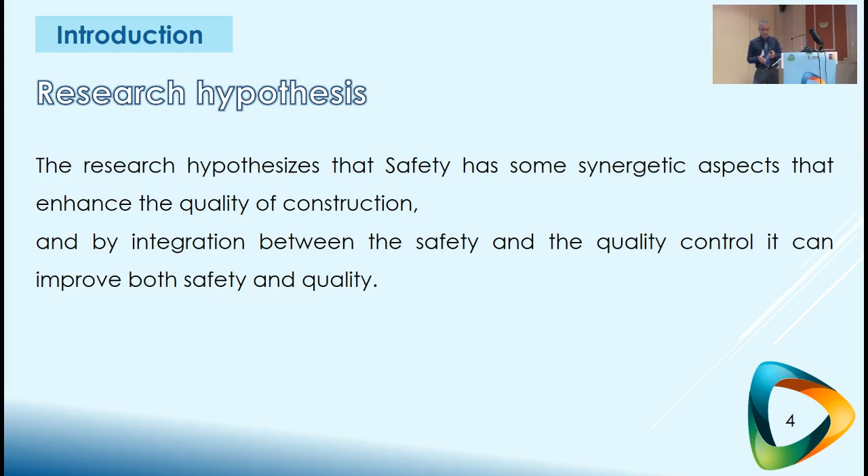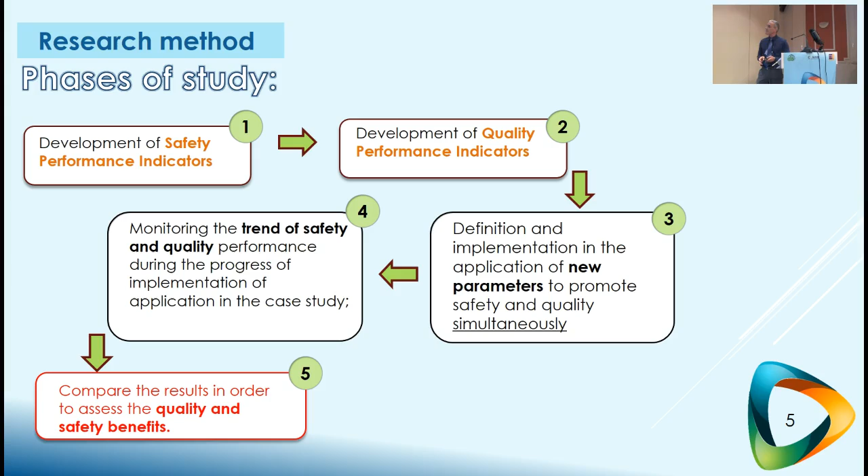This is our validation research. We developed two safety indicators and one quality indicator, then monitored these indicators following implementation of our mobile application, which I will describe. We tried to figure out if we can achieve significant improvement in both quality and safety in the case study project.

The first indicator was the safety indicator. We classified the safety behavior of construction workers into 5 categories. Remarkably safe behavior means workers fulfilled all expectations without limitation, including personal protective equipment, workstation setup, care for teammates, and surrounding environment. I cannot detail it fully here, but we'll submit a paper soon to ASCE where you can see the precise definitions: safe behavior, reasonably safe without personal risk or risk to colleagues, risk to himself, risk to others, and the worst behavior, risk to himself and others.

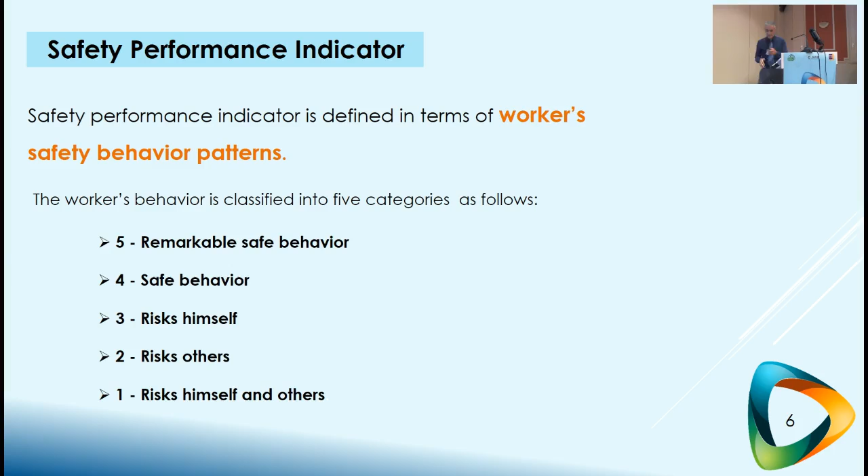We have a data collection form that we fill weekly, on the same day and hour each week, monitoring at least 10 workers over a period of 2 hours. This produces a safety sample that can represent the safety environment and safety performance of the workers.

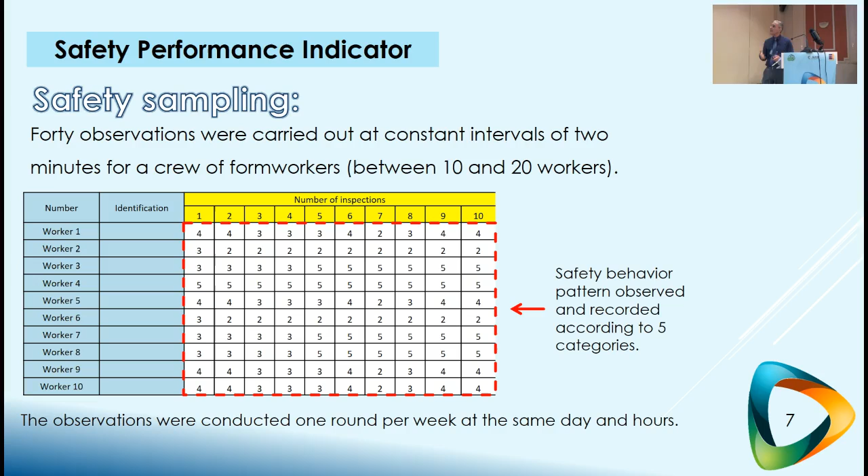It looks like this. This is an example of a not-so-good safety profile. We can see that only about 50% of the behavior falls under category 4 or 5, namely safe or remarkably safe, and 50% is under expectations: risk to himself, others, or both.

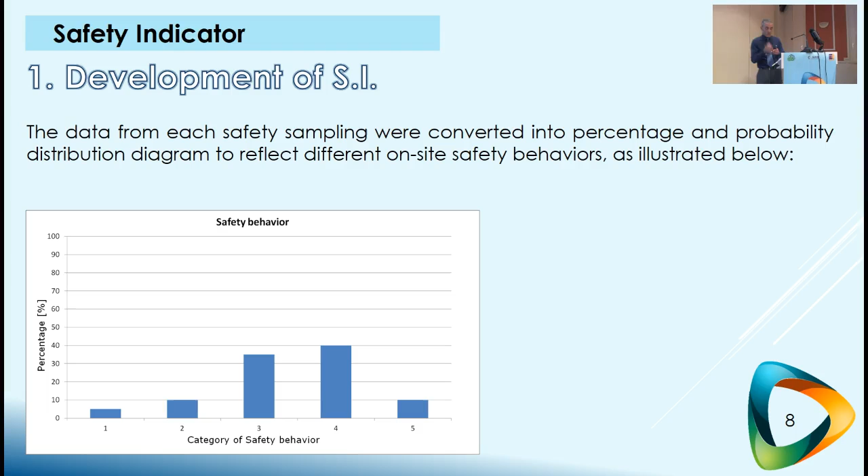Using this indicator, we give each category a weight: one for remarkably safe, 0.75 for safe, 0.5 for risk to himself, and so on. By multiplying the number of observations for each category, we get a good expression of the safety culture on site. This is a proactive indicator that can predict the culture or safety performance of the site.

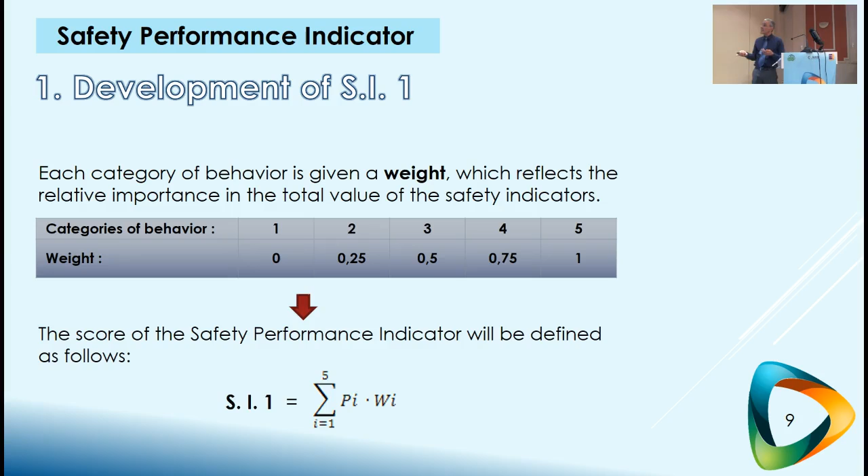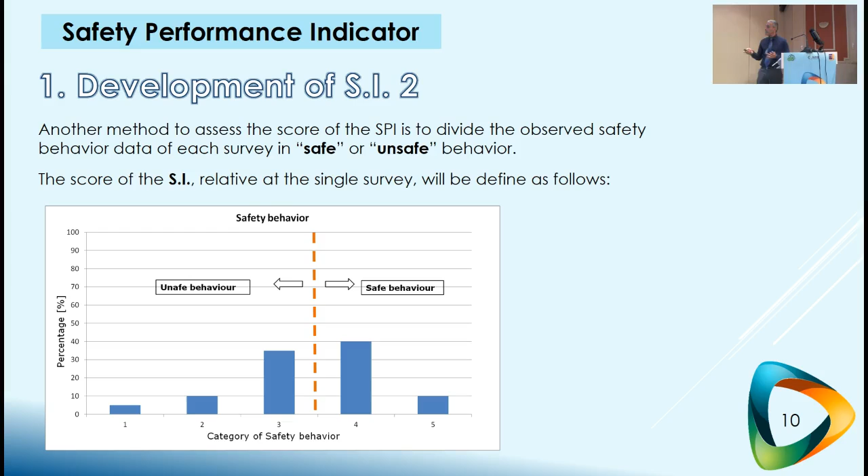At the same time, we can split observations into two categories: safe, meaning category 4 and 5, and unsafe, categories 1 to 3, to see the level of risk on site. The total of categories 1 to 3 indicates the level of risk. We can quantify easily the level of risk that workers are found in during sampling or performance.

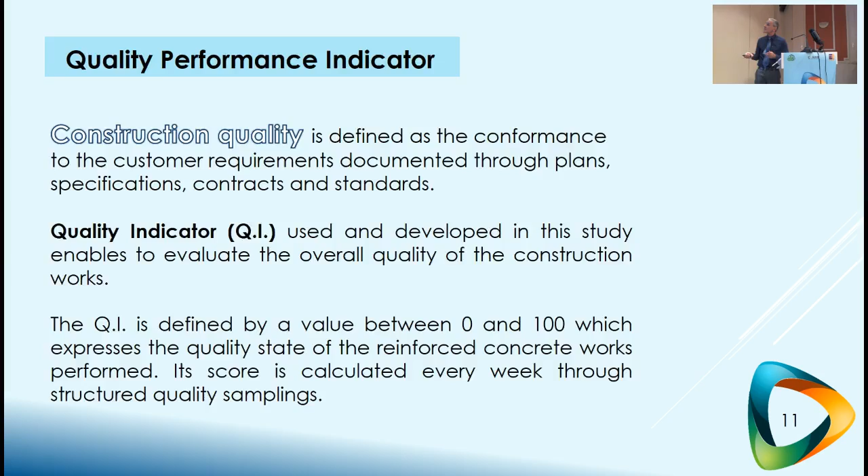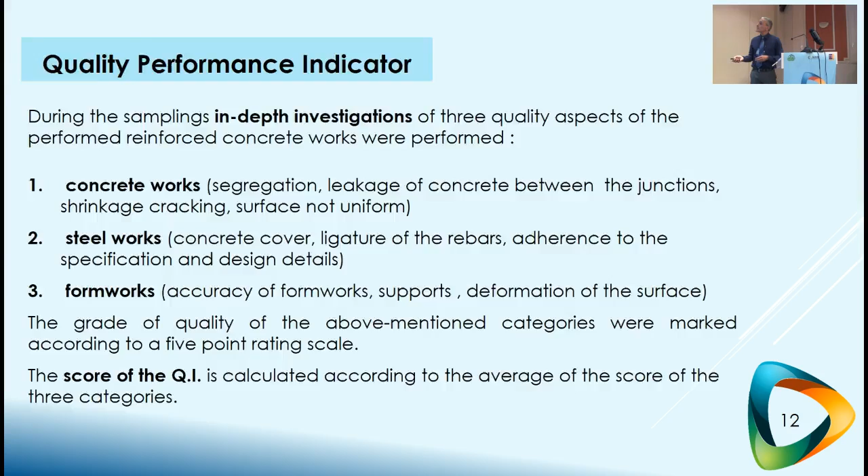In a similar way, we developed a quality indicator regarding structural or skeleton works. This indicator assessed the quality of concrete works, steel works, and formworks according to basic requirements and standards. We monitored it at the same time, on the same days, in a manner similar to the safety performance monitoring.

This is the architecture of the application and the phases of implementation. It takes about 2 weeks to establish the application on a construction site. This includes building the database for the project, including all workers, equipment, and entities, which is then automatically synchronized with the application.

The application is mounted on mobile smartphones. Phase 3 is the characterization and designation of each entity using a quick response code with the application. Phase 4 is documentation of the control using a digital checklist.

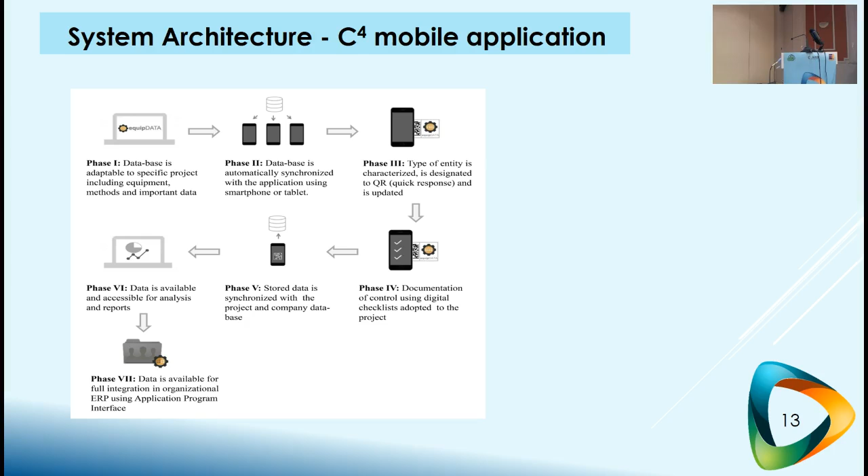In this phase, the application is on at the site, and the data is stored to a cloud computer and synchronized with the project and company database. Then the application can be used for control and communication of safety and quality. At this stage, the data is available, and senior management at all levels of the construction project and company can monitor the safety and quality, and the data is available for full integration in the ERP system of the company.

This is an outline of reports produced by this application. The activities and services carried out with the application are preparedness assessment.

Survey and tasks, safety and quality surveys, and safety and quality tasks, instructions, daily safety quality audit, normally carried out in Israel by the foreman or the superintendent on site, intervention and corrective activities made also by the first line management, pre-work risk assessment. Pre-work includes ladders, formworks, assessment of formworks, and others.

And safety investigations in case of illness or an event of safety, such as an accident or a violation of regulations. The reports include a hazard assessment report, produced daily, documentation of the survey and inspection by the foreman. If something is not carried out in the morning, it should be carried out. We have a report if it has not been completed by the crane operator or by the foreman.

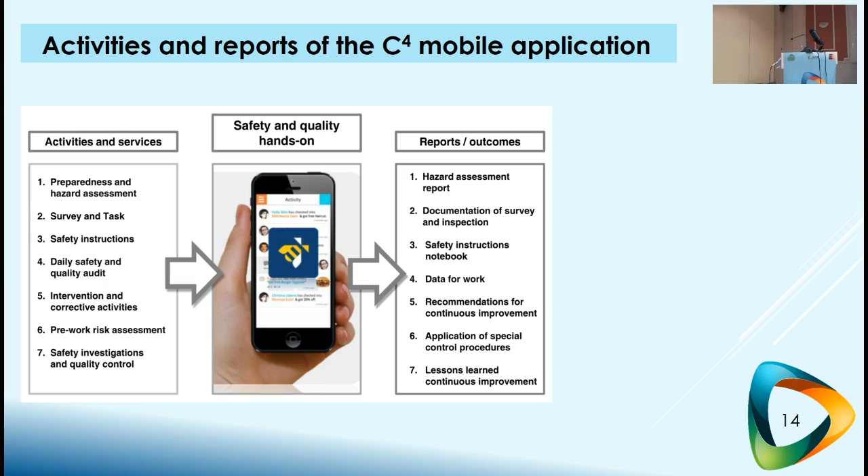And then lesson learned. So the application uses wireless medium, internet or cellular. Transmission rate is 5 seconds. Barcode is quick response. Operations run on iPhone operating system or Android, and the database is SQL, HTML, and GET and POST API protocols.

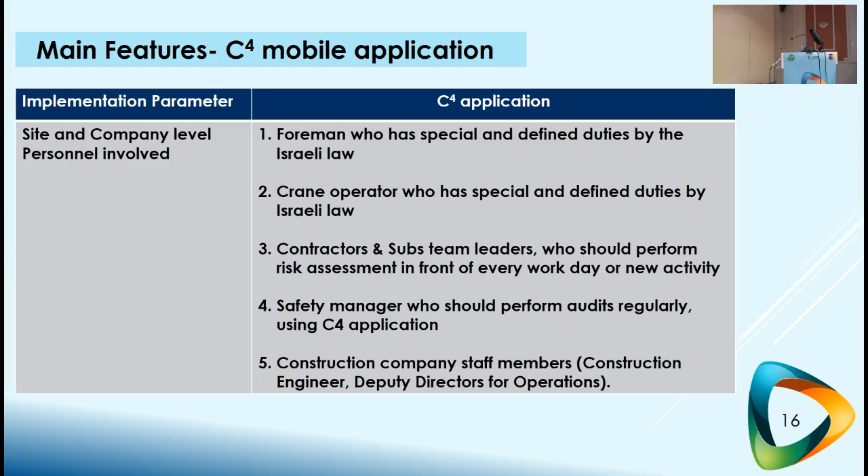This is an outline of who uses the application: foreman, crane operator, contractors and subs, team leaders, safety manager, safety officer in the company, and construction company staff members such as construction engineer, civil engineers, and deputy or vice president for operations, and so on.

Reports produced by the application include formal reports required by the regulations, which were normally implemented manually and now can be fully produced electronically and automatically. The application makes safety and quality office work totally unnecessary, completely electronic.

200 daily reports are produced based on the inspections made by the foreman and crane operator or the subcontractor. 35 weekly reports about the state of safety and quality in the site, and 200 safety tour reports carried out by the foreman and subs. 500 crane check reports, including all the equipment surrounding, including lift schemes, mechanical condition of the equipment, and so on.

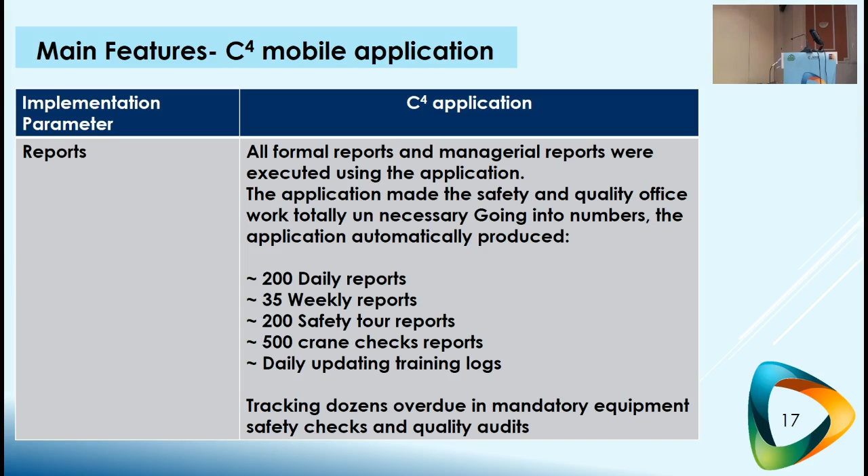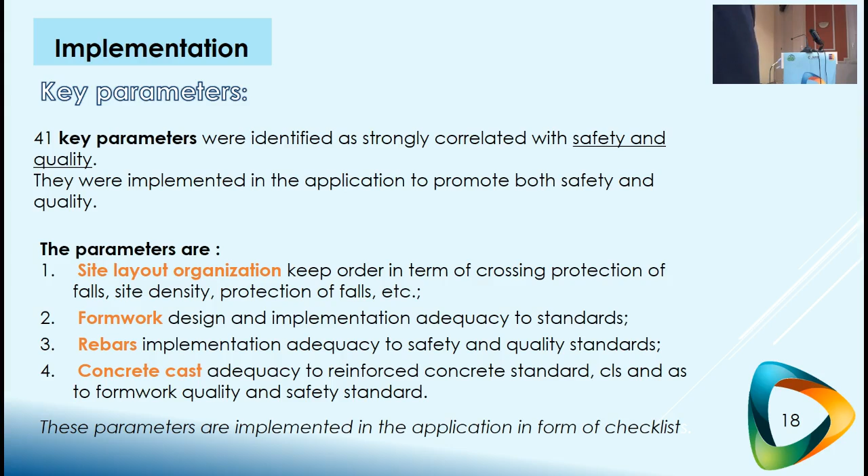The implementation includes also key parameters such as site layout organization concerning safety, formwork, rebars, and concrete cast concerning quality. The findings here are from a pilot study carried out last year in Israel, in a project in Ramat Gan.

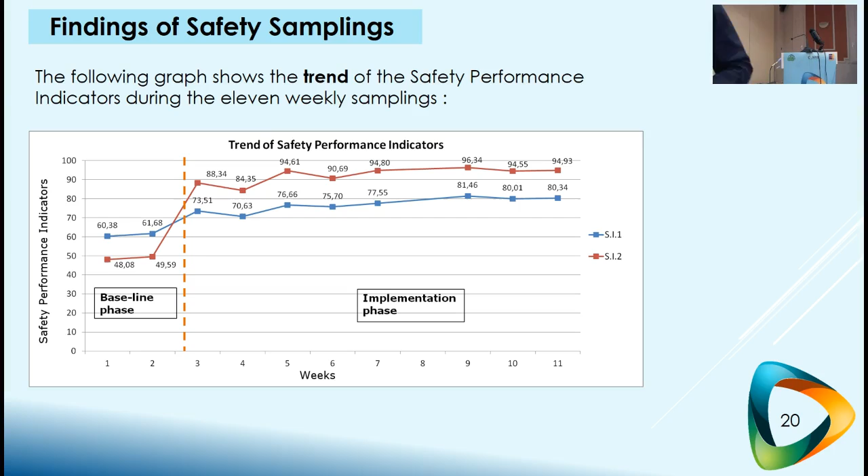This is a country like my own with relatively low safety culture. We see here some pictures of the baseline before: very bad site layout, and after, reasonably good. Here are the levels of safety indicator: 60 and 48, and here 76 and 95.

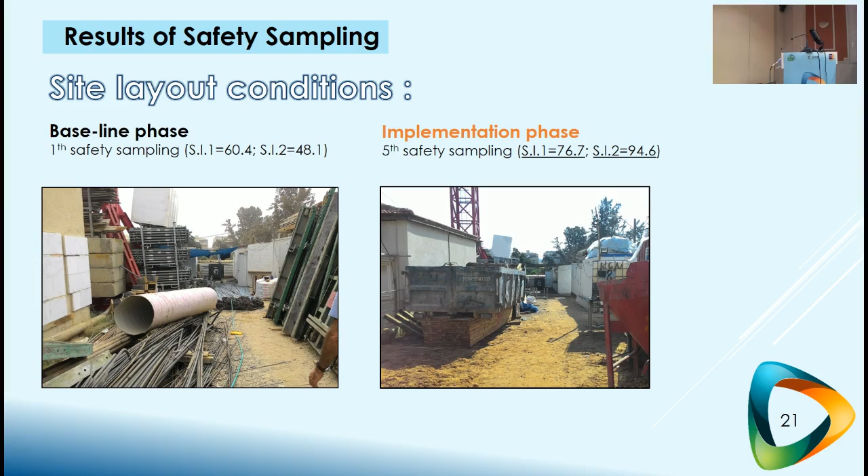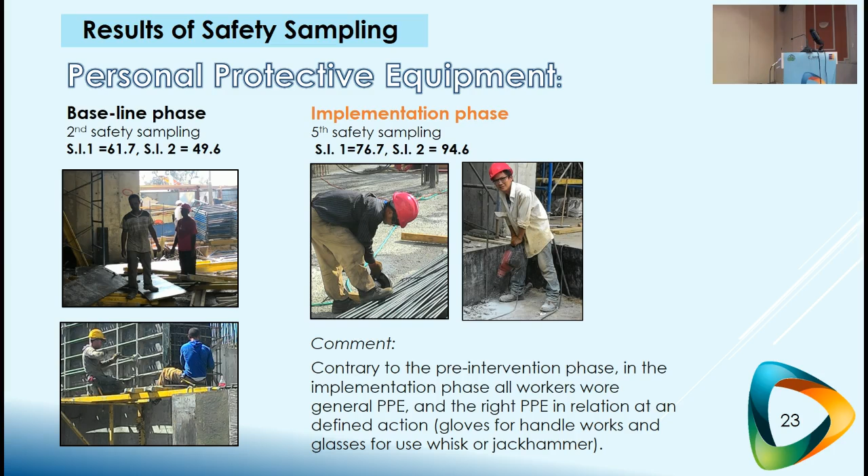Here baseline, you can see very messy workstations, and here much better. Again, you can see improvements in personal protective equipment: lack of PPE here, and here much better.

Before and after, this is the quality aspect. Again, in quality we achieved a significant improvement, from 63 to 93, 94, very similar. The difference between the two stages was tested using a t-test, and the findings were found to be statistically significant.

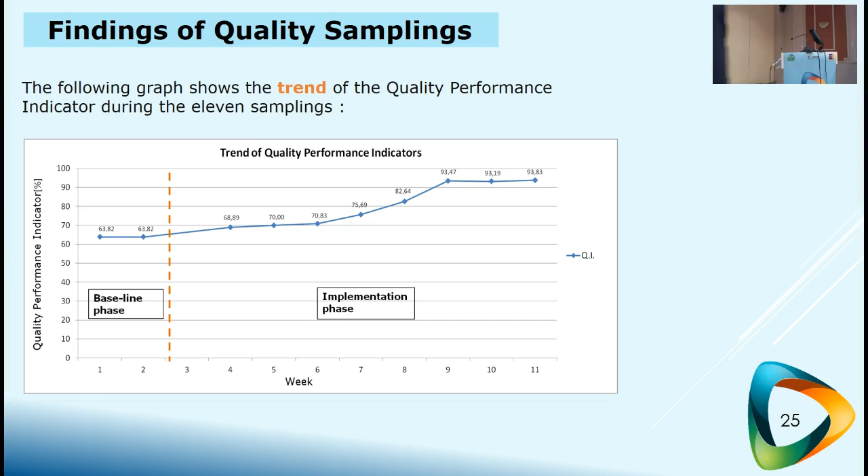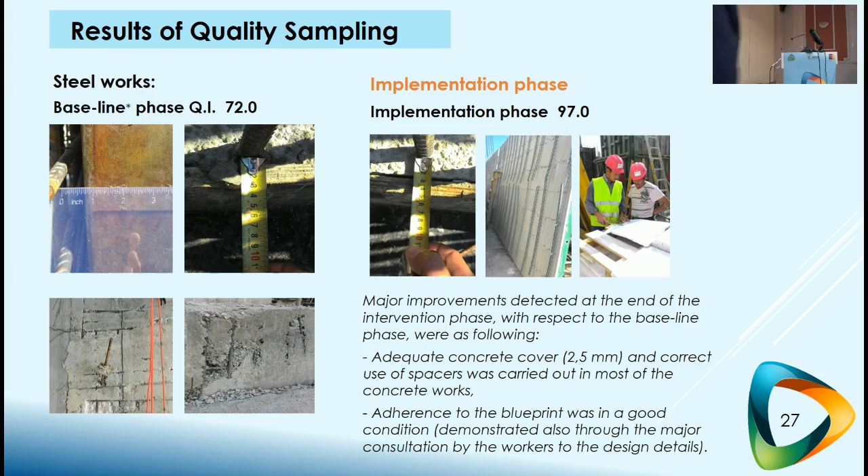At 99%. Here is the concrete level before: leakage of concrete, segregation, much better using the application. And again, concrete cover insufficient here - 1.5 centimeters, about half an inch - and here, following the application, adequate. This is formwork, before and after.

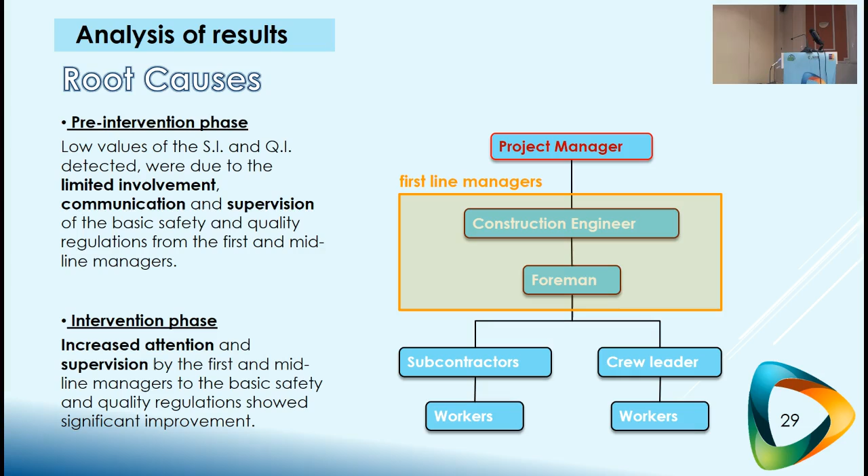We consider the improvement due to the strong involvement of first-line managers, foreman, and the construction engineer. In conclusion, the study stresses that control, command, and communication of safety and quality by the first-line manager is a key factor. A mobile application can enhance and stimulate this process.

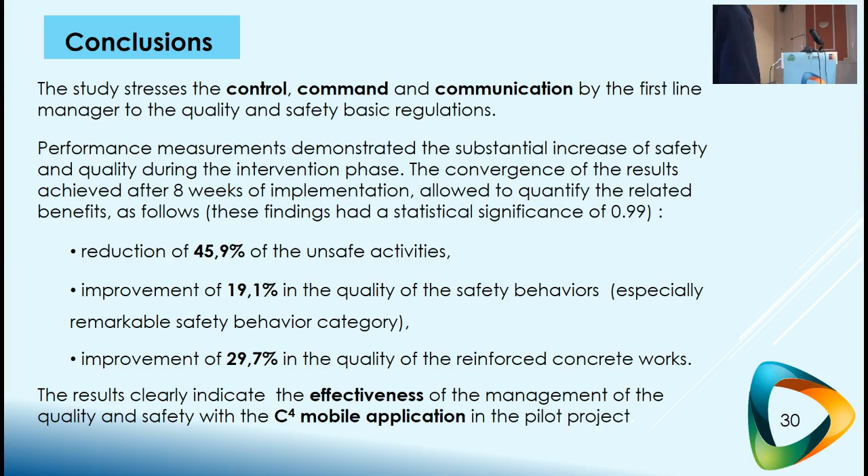Performance measurement demonstrated a substantial increase in safety and quality during the intervention phase: reductions of 46% in unsafe activities, improvement of 20% in quality and safety behavior, and improvement of 30% in the quality of the reinforced concrete works. Thank you for your attention.